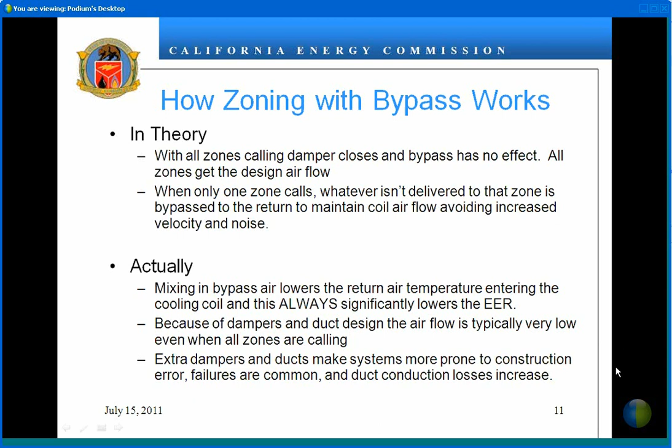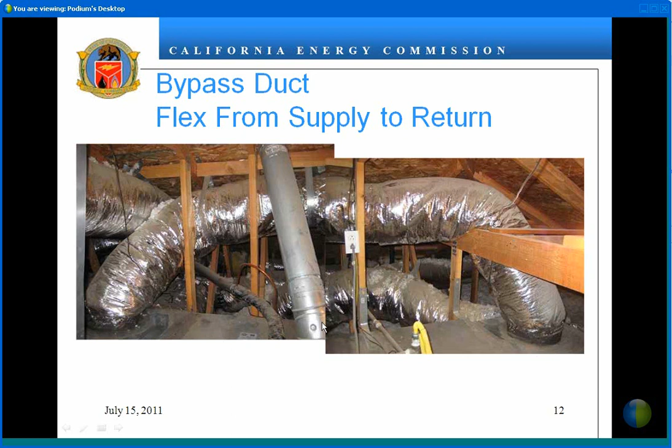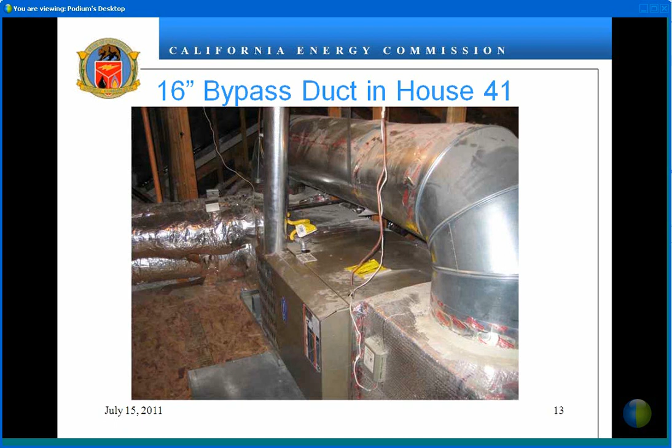Here's another example in one of the houses we surveyed where there's this 16-inch metal duct here that goes from the return supply over here to the return over here. And you can see the arm here of the gravity damper that's supposed to open and close when the pressure in the duct system changes so that the air can go back around in the bypass.

Okay, so one of the things we wanted to acknowledge was the comments from some stakeholders based on our case presentations. The Air Conditioning Contractors of America and the Air-Conditioning, Heating, and Refrigeration Institute, AHRI, both commented that they want to maintain the current credit for zone systems, and have argued that in some cases there's energy savings, and they want to maintain the use of the bypass duct.

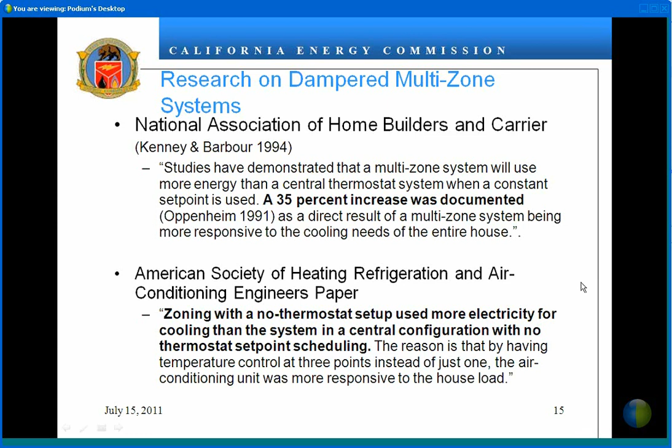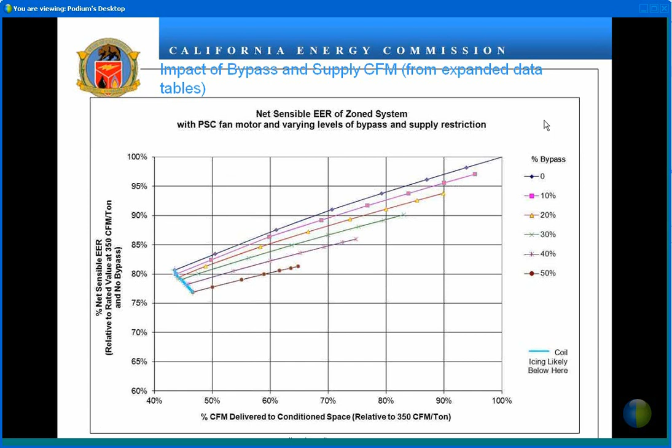So the other thing we did is we went out and measured the detailed operation of zone systems in 3 houses that we selected from those that we surveyed in that field survey. Each one of these houses, we spent a whole day with a crew of people and measured the net sensible EER of the zone systems based on the tons at the register approach. You measure the airflow and temperature of the air at each supply register and the airflow and temperature of the air at the return register, and you can calculate how much cooling was delivered to the space. In this case, we're talking sensible cooling.

And then we manipulated the controls in the systems manually to achieve different levels of bypass and different levels of CFM, just to see what the impact would be on our net sensible EER number here. Again, the same terms, it's percentage of the nominal, and down at the bottom is the percentage of the CFM delivered to the conditioned space. And you can see that when you're up here at 100% airflow to the space, we're in the neighborhood of 100% of the nominal capacity.

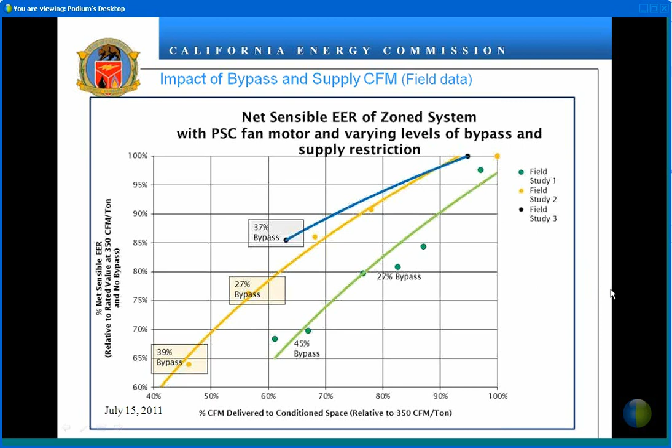And there's lots of interactions between things like how leaky the ducts are and where they're located. Are you running more air through the ducts in the attic that have the big leaks or not? These are the systems as found in the field. It's only 3 houses, but the results all agree with each other pretty well.

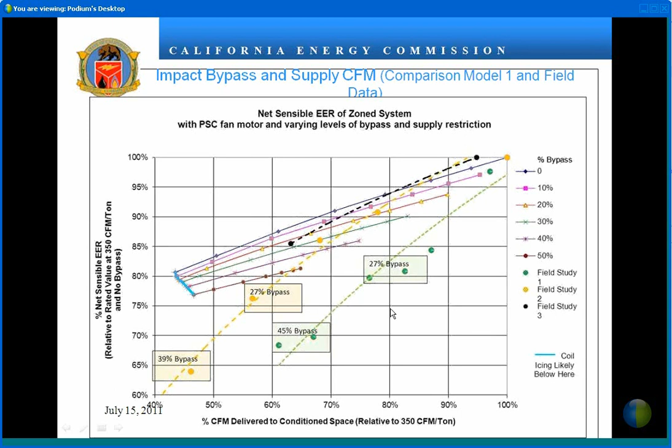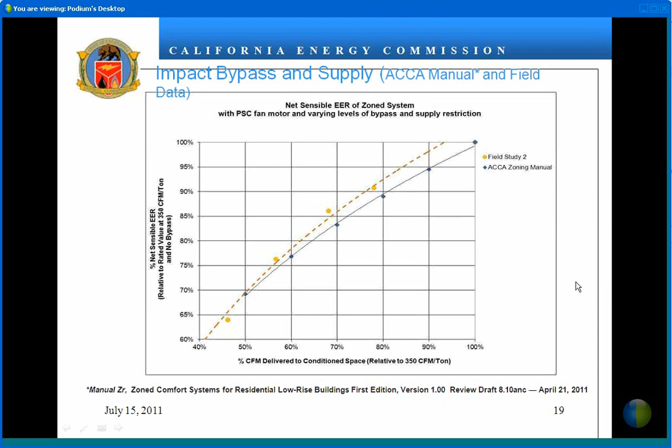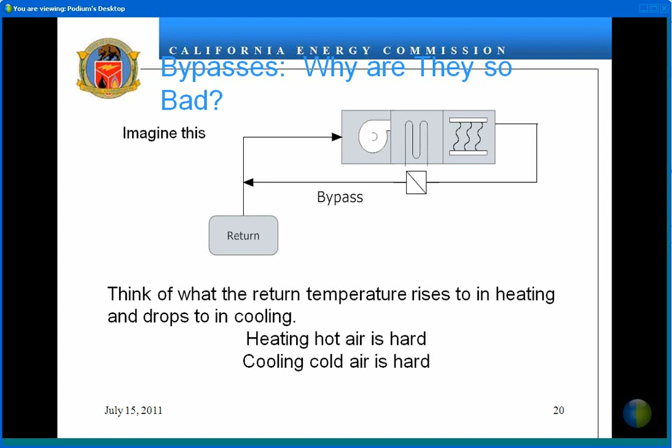But in cooling, the temperature keeps going down colder, colder, colder until again you end up with the system going off on safety controls. It gets harder and harder to provide cooling when the air coming back to the system is actually at the temperature you're supposed to be making it with the air conditioning. So this is what's going on with the bypass.